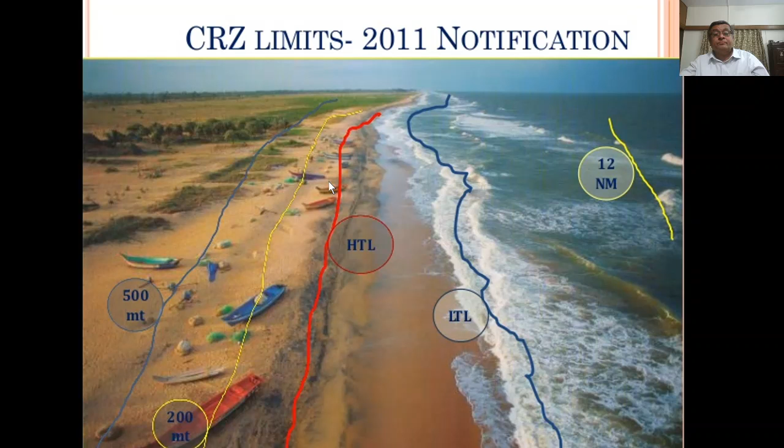So this comes under the limit of coastal regulation zone. Here you can see 50 meter NDZ in mainland island and backwater island.

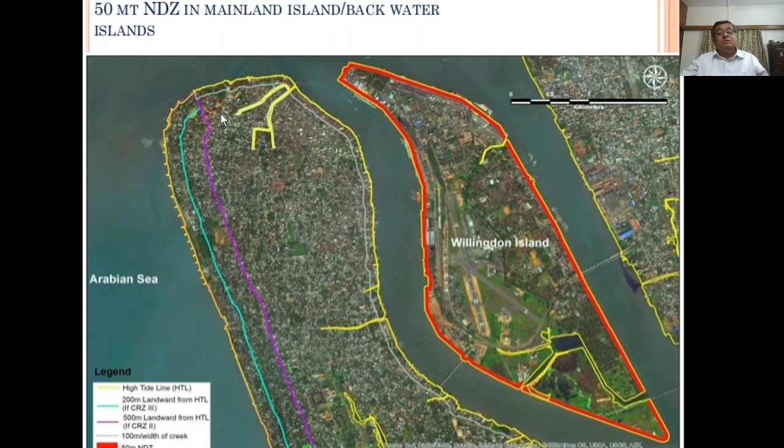Now CRZ classification and regulation. These are the legends: high tide, 200 meter CRZ line, 500 meter CRZ line, then rural urban boundary. You can see the legends over here. Just go through this figure.

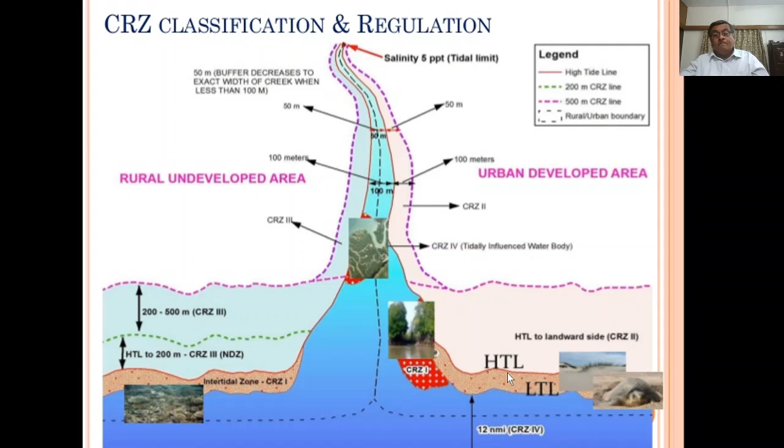Now let's see CRZ1. This is CRZ2, applicable to metropolitan cities like Mumbai.

Now special provisions for Mumbai, Kerala and Goa. Mumbai specific regulations include slum redevelopment schemes and redevelopment of dilapidated or unsafe buildings, dynamic town and country planning regulations but with stringent norms, C and AG, RTI (right to information), 51% state government stake, monitoring by a high level oversight committee, and public consultation of individual projects.

The list of dilapidated buildings was frozen on 6 January 2011. Koliwadas, that is fishermen's villages, and Goathans are declared as CRZ3, within CRZ2, thus NDZ of 200 meters applies. There is restriction on construction and reconstruction of fishermen's houses.

The islands within the backwater shall have 50-meter NDZ in Kerala. The mangroves, such as Khazan land, shall be protected and a management plan for the Khazan land prepared, and no developmental activities shall be permitted in the Khazan land in Goa.

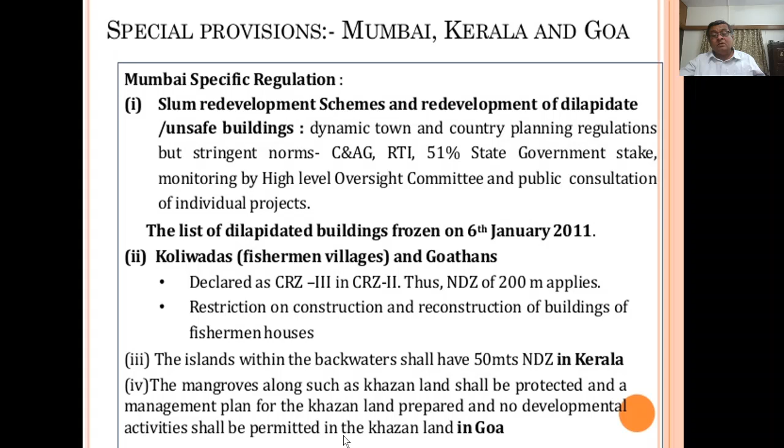This is CRZ classification: high tide line to 200 meters covers ports and harbors, repair and reconstruction of local people's houses with existing FSI or FAR, projects of the Department of Atomic Energy, salt manufacturers, non-conventional energy, POL storages, weather radars, basic facilities for local community like STP, ice plant, fishing infrastructure. From 200 to 500 meters, hotels and resorts with 9-meter height and 33% FAR, and construction/reconstruction of houses.

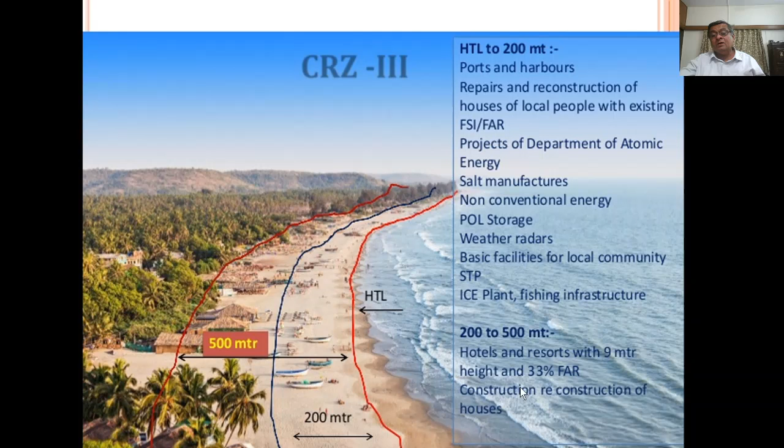CRZ4 regulations, you can just go through it. Now, developmental activities include prohibited activities: new industries and expansion of industries except projects of the Department of Atomic Energy and non-conventional energy.

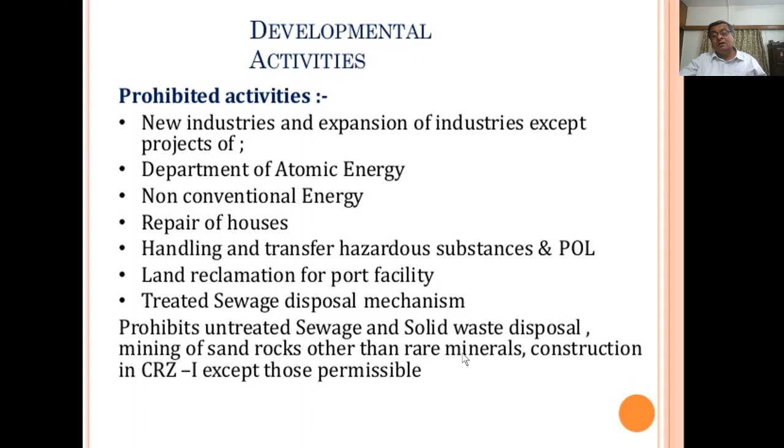Repair of houses, handling and transfer of hazardous substances and POL, land reclamation for port facilities, treated sewage disposal mechanism, prohibits untreated sewage and solid waste disposal, mining of sand rocks other than rare minerals, and construction in CRZ1 except those permissible.

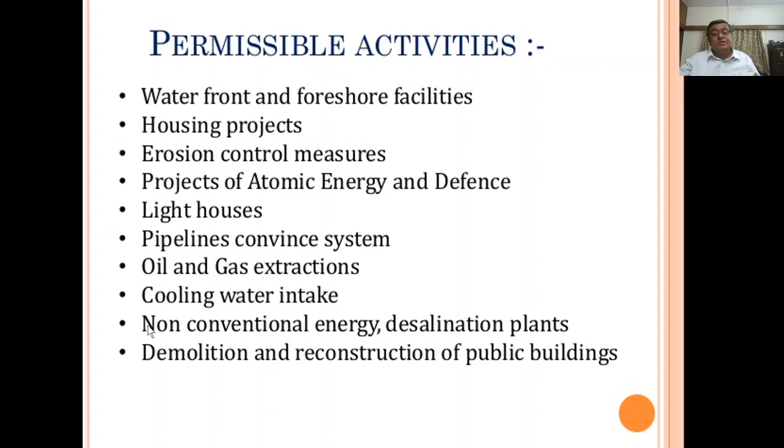Permissible activities include waterfront and foreshore facilities, housing projects, erosion control measures, projects of atomic energy and defense, lighthouses, pipelines, conveyance systems, oil and gas extraction, cooling water intake, non-conventional energy, desalination plants, and demolition and reconstruction of public buildings.

Issues in CRZ: housing construction in accordance with local town and country planning, tourism to be permitted along beaches with minimum setbacks or no setback, fishermen's houses to be constructed in NDZ, coastal roads and infrastructure to be permitted, eco-friendly development in ESA, reclamation to be permitted for construction, no CRZ regulation in port areas, thermal power and certain industrial activities and mining to be permitted, leading to pollution, erosion, salinization and destruction of habitats.

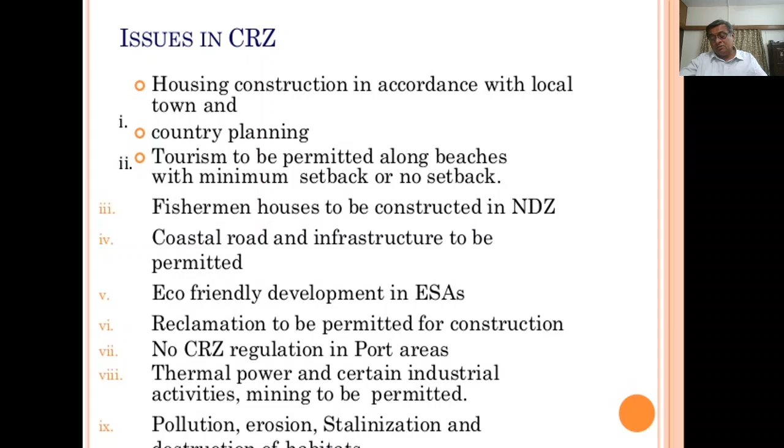What is basic infrastructure? Basic public infrastructure is built by dovetailing and synergizing with other missions and schemes such as AMRUT.

Basic infrastructure includes assured water and electricity supply, sanitation and solid waste management, efficient urban mobility and public transport, affordable housing, robust IT connectivity, e-governance and citizen participation, safety and security of citizens, health and education, and economic activities and livelihood opportunities.

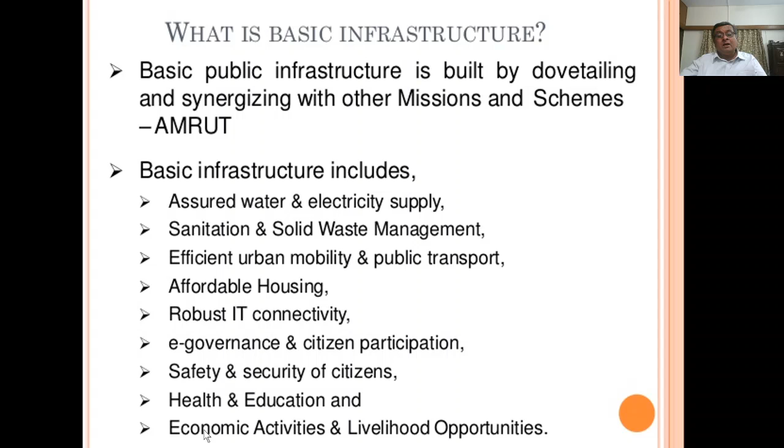Citywide smart solutions include e-governance and citizen services, public information, grievance and redressal, electronic service delivery, citizen engagement, city's eyes and ears, video crime monitoring, waste management, waste to energy and fuel, waste to compost, waste water to be treated, and recycling and reduction of C&D waste.

Water management includes smart meters and management, leakage identification, preventive maintenance, and water quality monitoring. Energy management includes smart meters and management, renewable sources of energy, and energy efficient and green buildings. Urban mobility includes smart parking, intelligent traffic management, and integrated multimodal transport. Others include telemedicine and tele-education, incubation, trade facilitation centers, and skill development centers.

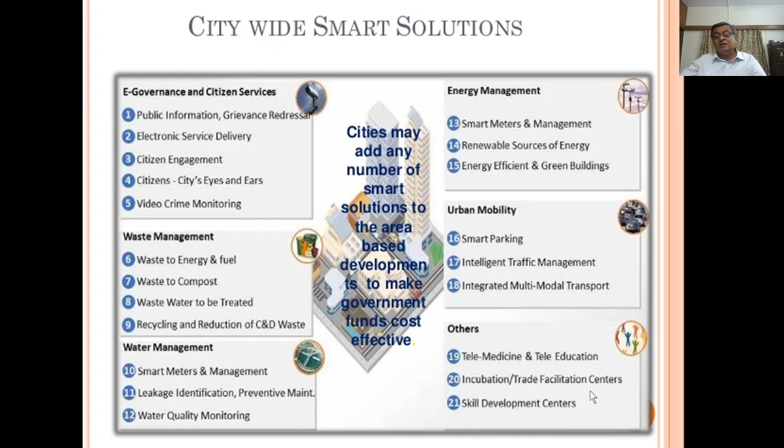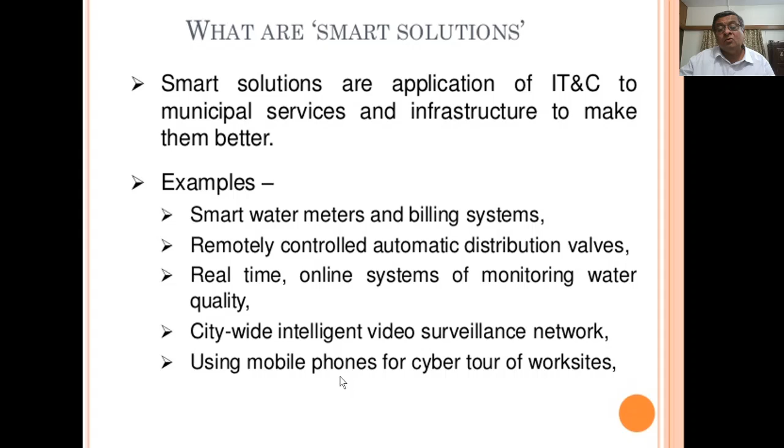What are smart solutions? Smart solutions are the application of information technology and communication to municipal services and infrastructure to make them better. Examples: smart water meters and billing systems, remotely controlled automatic distribution valves, real-time online systems for monitoring water quality, citywide intelligent video surveillance networks, and using mobile phones for cyber tours of work sites.

Area-based development models (ABM) - Retrofitting: development of an existing built area greater than 500 acres so as to achieve the objective of the smart cities mission, making it more efficient and livable. Example: local area development in Ahmedabad.

Redevelopment: replace existing built environment in an area of more than 50 acres and enable co-creation of a new layout, especially enhanced infrastructure, mixed land use and increased density. Example: Bhendi Bazar in Mumbai.

Greenfield: develop a previously vacant area of more than 250 acres using innovative planning, plan financing and plan implementation tools, with provision of affordable housing. Examples: New Town in Kolkata, Naya Raipur, and Gift City.

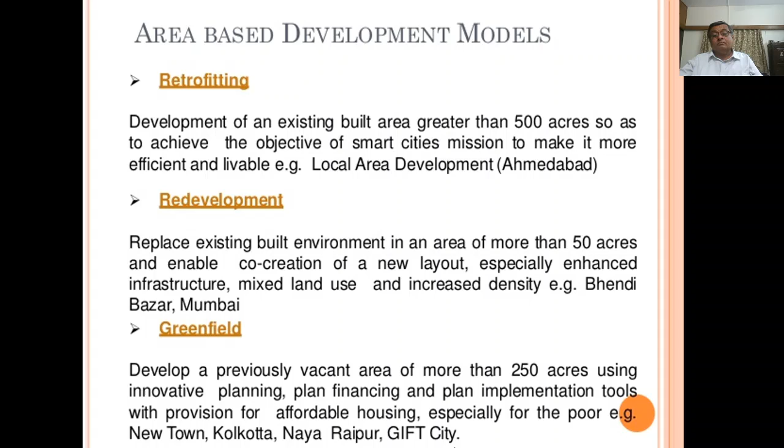Components of area-based development: holistic development of existing and new areas. One area catalyzes the development of other areas and sets an example for other cities.

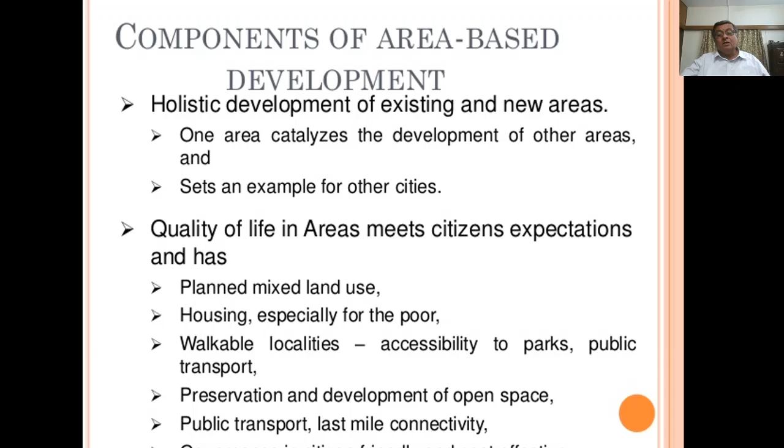Quality of life in these areas meets citizens' expectations and has planned mixed land use, housing especially for the poor, walkable localities, accessibility to parks, public transport, preservation and development of open space, last mile connectivity, and governance that is citizen friendly and cost effective.

Features: smart parking, intelligent transport system, telecare, traffic management, smart grids, smart urban lighting, waste management, smart city maintenance, smart taxi, and digital signage.

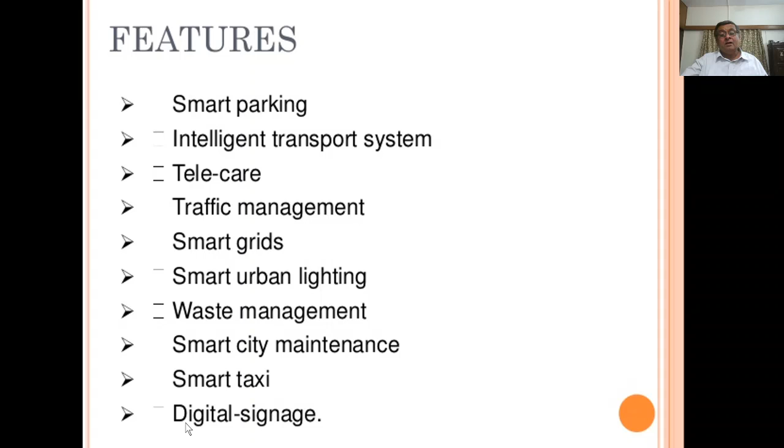AMRUT, that is Atal Mission for Rejuvenation and Urban Transformation. Provision of basic services to households and building amenities in cities will improve quality of life for all. During 2011, a High Power Expert Committee (HPEC) estimated an amount of 39.2 lakh crore for creation of urban infrastructure.

Learning from earlier missions has shown that infrastructure creation should have a lot of impact on the real needs of people, such as providing tap and sewerage connections for households. Focus should be on creation of infrastructure which has a direct link to provision of better services to the people, according to the President of India.

Pursuit of better outcomes will not stop by providing taps and sewage connections to all. Other benchmarks will be targeted following a step-by-step process after achieving the benchmark of universal coverage, a gradual process of achieving benchmarks incrementally.

Before, the Ministry of Urban Development used to give project by project sanctions; now replaced by state annual action plans once a year by MOUD, that is Ministry of Urban Development, and states have to give sanctions and approval at the end.

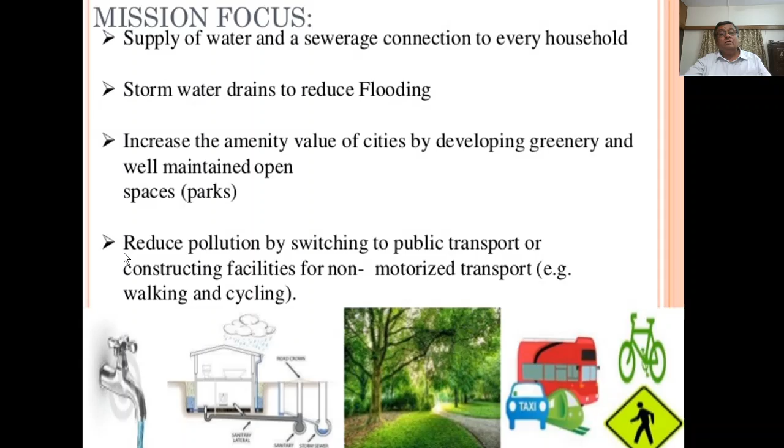Criteria of selection: cities and towns with population more than 1 lakh, notified municipalities and cantonment boards, all capital cities and towns of states and union territories, and all cities and towns classified as heritage cities by the Ministry of Urban Development under the HRIDAY scheme.

13 cities and towns on the stem of main rivers with population ranging from 75,000 to 1 lakh. 10 cities from hill states, islands and tourist destinations with population not greater than 1 lakh, one from each state.

Central government provides one-third funding if the population is greater than 10 lakhs, and 50% if the population is less than 10 lakhs. Mission components: water supply.

Water supply system including augmentation of existing water supply, water treatment plants and universal metering, rehabilitation of old water supply systems including treatment plants, rejuvenation of water bodies specifically for drinking water, supply and recharging of groundwater, and special water supply arrangements for difficult areas, hill and coastal cities including those having water quality problems.

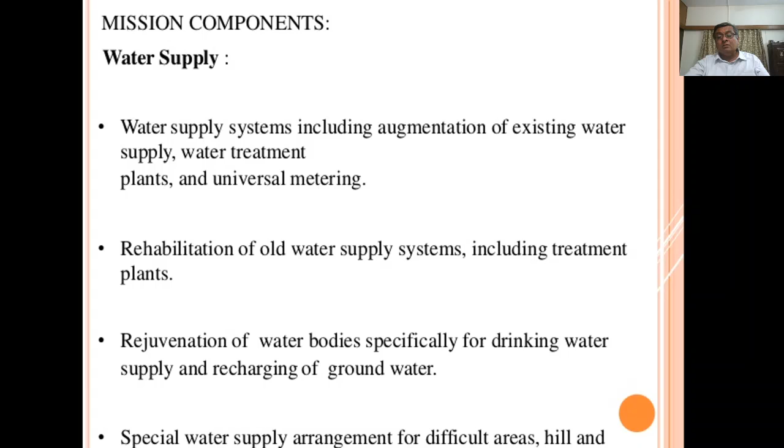Sewage: decentralized network underground sewage system including augmentation of existing sewage systems and sewage treatment plants, rehabilitation of old sewage plant systems and treatment plants, recycling of water for beneficial purposes, and reuse of wastewater.

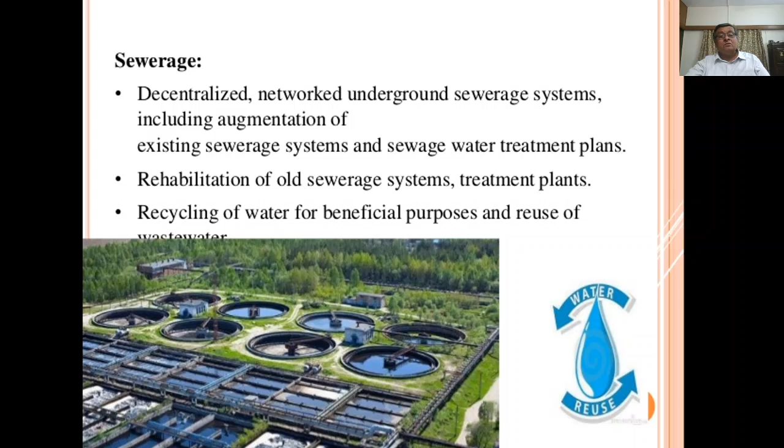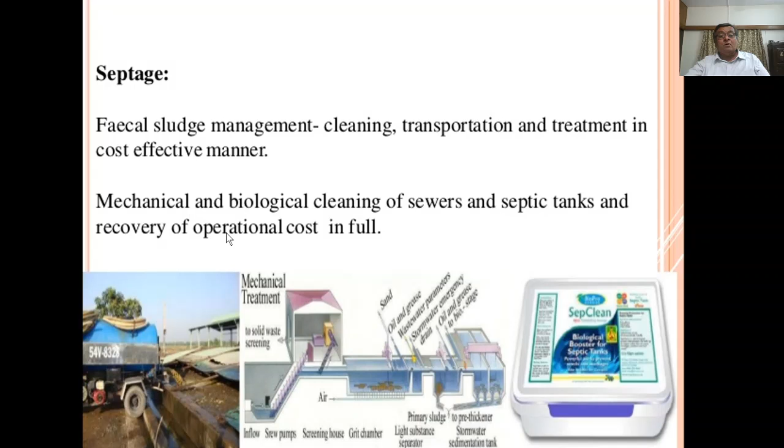Septage and fecal sludge management involves cleaning, transportation and treatment in a cost effective manner, using mechanical and biological cleaning of sewers and septic tanks, and recovery of operational cost in full.

Stormwater drainage: construction and improvement of drains and stormwater drains in order to reduce and eliminate flooding.

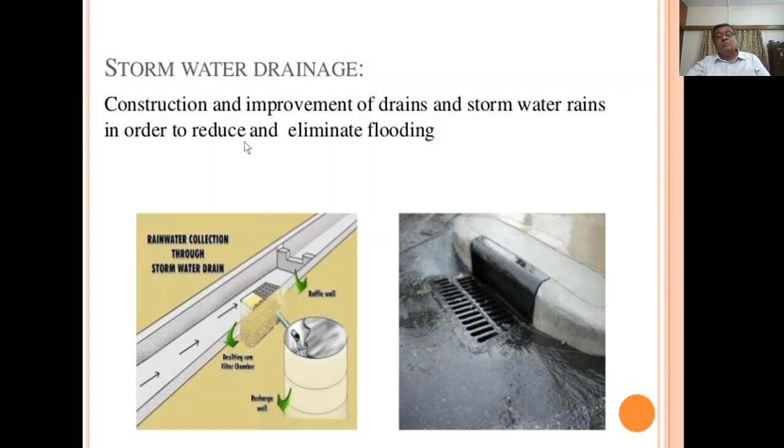Urban transport includes ferry vessels for inland waterways excluding port bay infrastructure, buses, footpaths, walkways, sidewalks, foot overbridges and facilities for non-motorized transport such as bicycles, multi-level parking, and bus rapid transit system (BRTS).

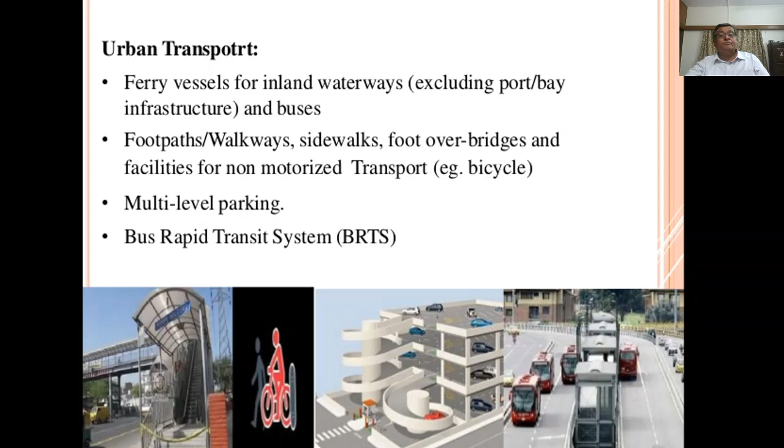Green space and parks: development of green space and parks with special provisions for child-friendly components.

Indicative list of inadmissible components: purchase of land for projects or project-related work, staff salaries of both state government and ULBs, power, telecom, health, education, wage employment programs, and staff component.

Program management operates at the national level through the Apex Committee, at the state level through the High Power Steering Committee (SHPSC), and at the city level through urban local bodies, that is municipalities and corporations.

Urban local bodies (ULB) will be responsible for the mission. The Apex Committee is chaired by the Secretary of Urban, Ministry of Urban Development, including secretaries of relevant departments as members, with mission directors as member secretary.

The approach involves the SAAP from SHPSC, which allocates funds to states or union territories, overall monitors and supervises the mission, and advises states or union territories on innovative ways of mobilizing resources, private financing, and land leveraging.

The State level High Power Steering Committee (SHPSC) is headed by the state chief secretary, with principal secretaries of related departments and the principal secretary of urban development as member secretary. It identifies gaps in infrastructure and ways to achieve urban reforms, and finalizes financial layouts.

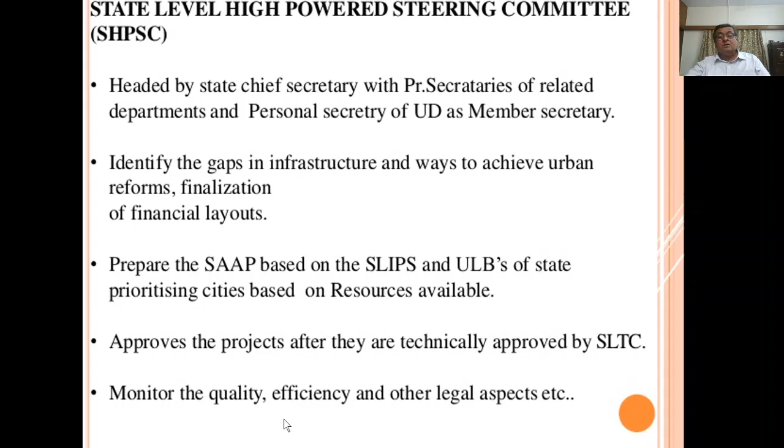Urban local bodies (ULB) will be responsible for the mission. The Municipal Commissioner oversees preparation of the SLIP, and ULBs will develop it.

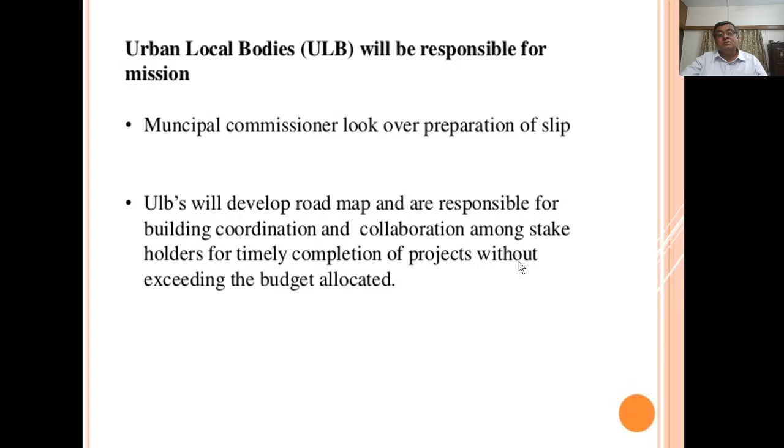ULBs develop roadmaps and are responsible for building coordination and collaboration among stakeholders for timely completion of projects without exceeding the allocated budget, including preparation of service level improvement plans (SLIPs).

The service level improvement plan (SLIP) has to be prepared by each ULB, and the strategic steps are: assess the service level gap, bridge the gap, examine alternative costs, estimate the cost, and prioritize financing and reforms.

State Annual Action Plan (SAAP): the basic building block for the SAAP will be the SLIPs prepared by the ULBs.

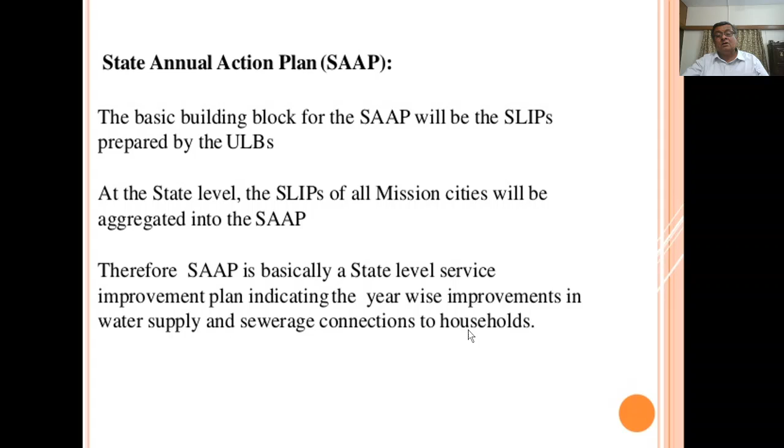At the state level, the SLIPs of all mission cities will be aggregated into the SAAP. Therefore, the SAAP is basically a state level service improvement plan indicating the year-wise improvements in water supply and sewerage connections to households, covering principles of prioritization, importance of operation and management, and financing of projects.

Approval of SAAP: AMRUT will provide project funds to ULBs through the state. Criteria used by the Ministry of Urban Development to evaluate the SAAP include: how well has the state government diagnosed the service level gaps, how well has the state planned and financed capital expenditure, what is the expected level of financial support from the central government, and how have the state, ULBs, and other sources of finance been identified and assessed.

Fund allocation: the total outlay of AMRUT is 50,000 crore for 5 years, from financial year 2015-16 to financial year 2019-20, and the mission will be operated as a centrally sponsored scheme.

AMRUT may be continued after evaluation by the Ministry of Urban Development and incorporating learnings from the mission. The mission funds will consist of four parts.

These are: project fund, 80% of the annual budgetary allocation; incentives for reforms, 10% of annual budgetary allocation; state funds for administrative and office expenses, 8% of annual budgetary allocation; and Ministry of Urban Development funds for administrative and office expenses, 2% of annual budgetary allocation.

Release of funds happens in 3 installments with a ratio of 20:40:40. The funds will be kept in a separate bank account by the implementing agency.